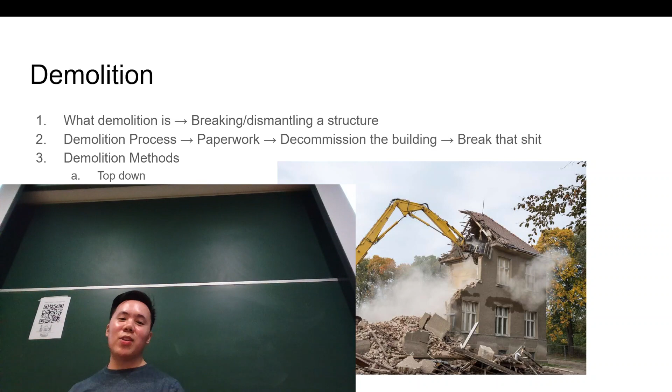Okay, so demolition, you guys would have gone through it, right? I'm just going to briefly run through what demolition is. So demolition, you're basically trying to break down some sort of structure, dismantle it. The demolition process usually has a lot of paperwork, and then you decommission the buildings to get all the electrical lines, gas lines, water lines, and then you break the structure down. Demolition methods: top down, high reach arm, wrecking ball, implosion, and induced collapse. And then demolition safety, just PPE and making sure the site is separated and not dying, basically.

Okay, all right. So before we go into earthworks, I just want to draw a small diagram. It's not loading, bro. Oh, okay, all right, so...

Basically on any piece of land, right—let's say this is the land. There's going to be trees, hills and stuff like that, and maybe even buildings that are pre-existing. So let's say I'm infrastructure for New South Wales and I wanted to build something new on this plot of land. These are all, this is an old building that we don't use anymore, and we have trees and undulating terrain and stuff like that. So we have these hills and we want to get the land ready to build something new. Let's say we're building a metro station or something, I don't know if that's ever been thought of.

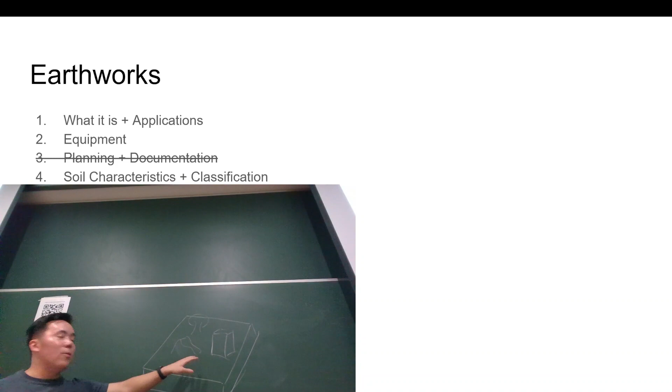So we would first want to make sure the land's flat before we can build anything on it. So what would be the first thing we want to do? We want to actually get rid of all the old buildings first, because the landscaping we can deal with after, but we want to make sure all the buildings are just cleaned and gotten rid of. So this first part, when we get rid of the buildings, what would that be? That would be demolition, right? So we go through that demolition process, we break down all the buildings, and then once all the buildings are gone, basically, we're left with...

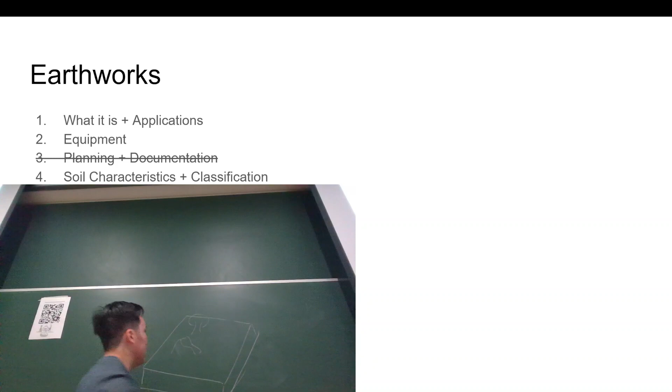Trees, hills, right? And we kind of want a flat surface that trains can run on, for example. So this second part, when we get rid of all the terrain and flatten it and do the landscaping, that's called earthworks. So that's what we're doing for this first part.

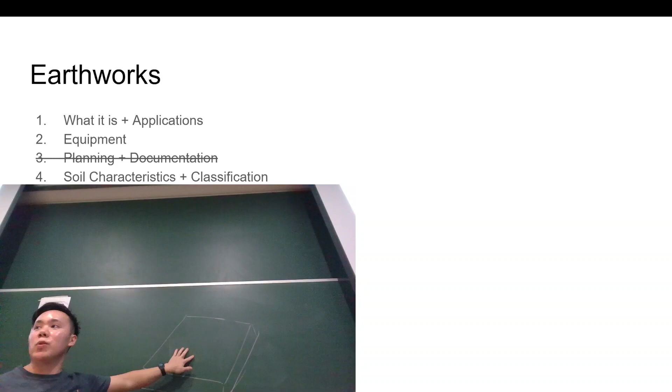After that, after all the earthworks is done and all the land is flat here, the thing that we do after is usually concreting. And concreting is usually we're building a foundation out of concrete so that we can actually build a building on top of it, because we can't build it right on the soil because soil moves a lot, yeah?

Okay, so for this first part of earthworks, we're just going to talk about what it is. Earthworks is manipulating the land or shaping the earth to fit our construction needs. Every site, no matter where it is, will need at least a tiny bit of earthworks. So even if you're building a granny flat in the backyard, the earth there may just have a slight gradient, and that's not good. We want to make sure it's flat, or we want to make sure the slope is a certain direction. So every single site, no matter how small or how big, will need some sort of earthworks.

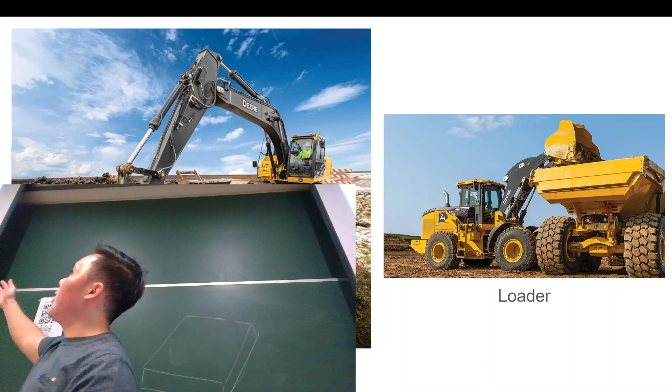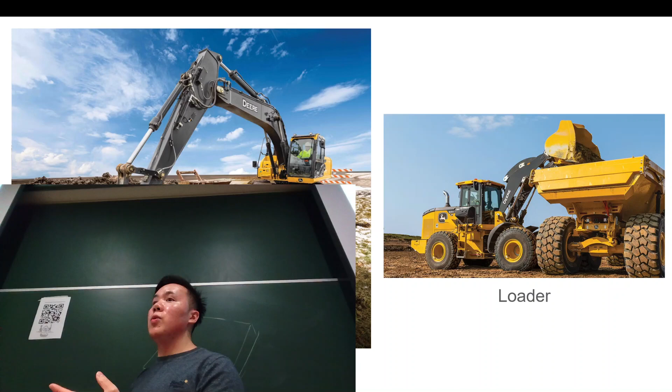The second one here is a loader. What this loader does is, for example, you can see the pile of dirt on the left there - it can take that dirt and put it into a truck. Now, an excavator can bring the dirt and put it directly into a truck, but if there's heaps of dirt, we actually want to minimize the amount of time that the excavator has to use to put that dirt into the truck. You'll learn about it with Josh when he goes through the actual formulas on calculating efficiency and the speed of how much earth an excavator can move. But typically on a larger site, they will use a loader as well.

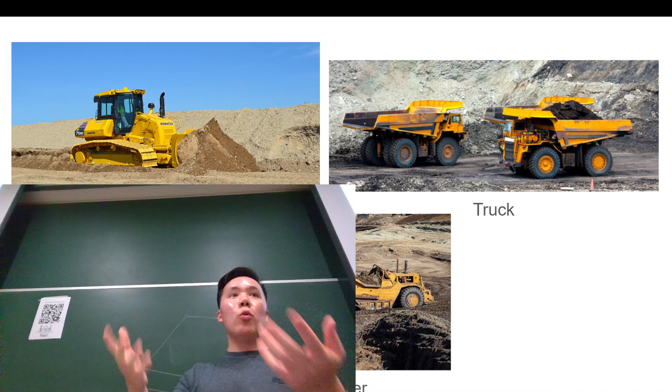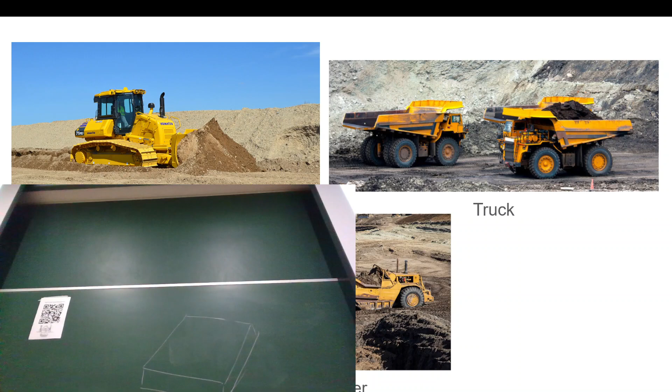A truck is used for holding dirt, and then that dirt is transported to somewhere else - usually off-site, or sometimes it's just put onto a side of the site that is not used right now. And a scraper is kind of like a dozer and a truck combined. It can actually hold a little bit of dirt, not as much as a truck, but it can hold the dirt and drop it in other places. So what a scraper does, it kind of does what a dozer does - it digs up, it plows up that land, and then it takes a little bit into its storage bin. You can see in the middle here, and then it can drop it wherever it needs.

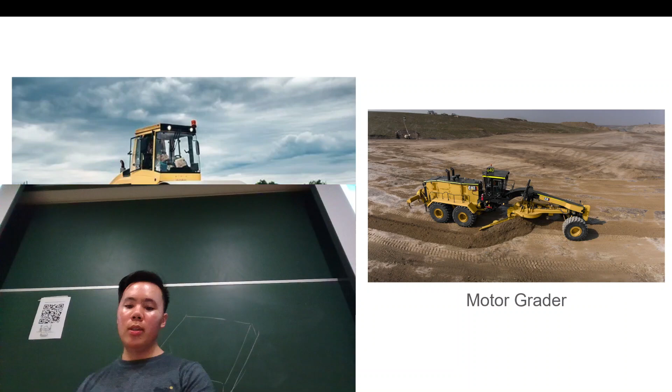Okay, so machinery - let's just classify all these. Excavation and loading, this is actually just digging up the land, and you think of this as the first stage. The kinds of equipment that we would use are excavators and loaders. So we basically are just getting the dirt moved into certain sections - this is like a bulk amount of movement. Next, we have pushing and hauling - that's basically the dozer, the truck, and the scrapers. They're trying to push dirt and move it somewhere else. And then we have finishing, which will be the rollers and motor graders, which kind of flatten the land.

All right. Okay. So basically, that's the kind of equipment and stuff that happens on site, right? So when we do the calculations, this is what we're gonna have to do. When we move the dirt, yes, we can move it, but we also want to calculate how much our truck can carry and whatnot. So these are the types of calculations.

So in general, for soil characteristics, high moisture is bad. Think about standing on wet sand when you're at a beach, right? You're going to start to sink through, you start to fall inside of it. So think about a truck now on a beach. It will actually get beached. It will fall into the sand. So moisture content is basically the amount of water to the amount of dry soil, and then you calculate that as a percentage.

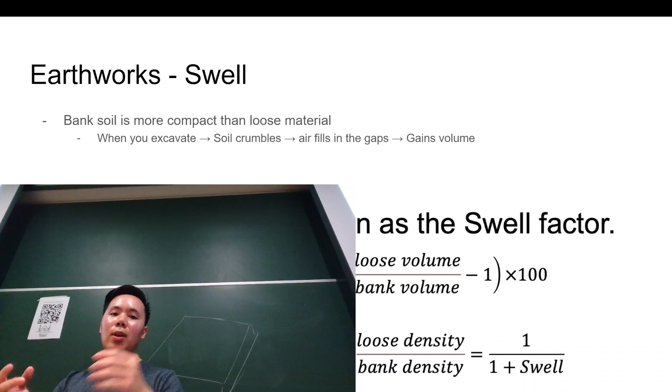So swell is, after you dig up that soil, the air goes in, and we get swell, and that's just the loose volume over the bank volume minus 1, and then we multiply that by 100%. I don't know how that comes about, but just trust me. I'm sure the tradies know what they're doing.

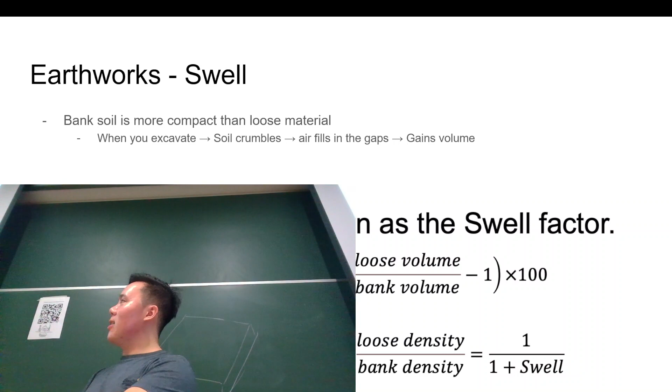And then the load factor. This is actually the more important thing. Usually they will give you a swell percentage, and then you have to figure out either loose volume or bank volume, and then you're gonna use that to do the load factor. Load factor is basically how much you can put on a truck. It would cost you more if the truck had to run more times to carry the same amount of dirt, so we want to pack on as much as possible, increase our efficiency and our KPIs.

Okay, shrinkage. So this is the opposite, right? So this is like a penis in the winter.

So it shrinks when we force the air out of it. The granules become more tightly packed. We're taking out that air, it becomes more tightly packed. Happens when we compact it, when we roll something over it. So shrinkage equals 1 minus compacted volume over bank volume times 100. And then we have the shrinkage factor as well, and we've got the formula for that.

Okay, does anyone have questions about that before we get into other parts? So we understand swell, shrinkage, yeah? Yes, okay, cool.

All right, so volume estimation. This is a topic that is theoretically easy to understand, but it's really easy to mess up in a calculation. I'm not gonna go through the calculations because we'll be here until tomorrow, but I'll go through the general gist of how these work. So the cross-sectional method is our first method. Think about this as a 1D method. It's usually used for things like highways and really long runways and stuff like that. Because when we have a, let's draw this out.

When we have a long road, usually all our roads are quite flat, right? So just take this as a cross-section. There's a cross-section of our road. Now, before we build a road on it, there's going to be land that kind of has hills and valleys, right? Some are going to be higher than others, some are going to be deeper than others. So what we want to do is level this land.

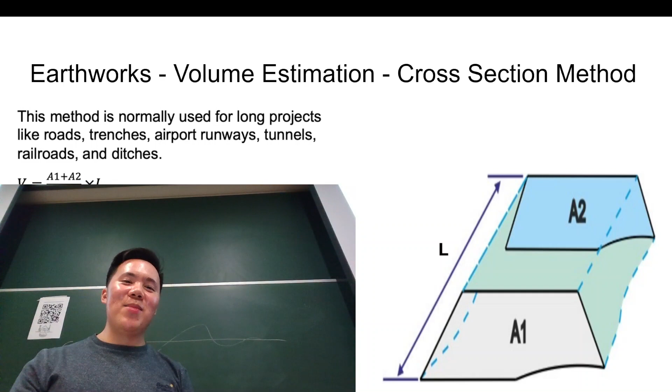Now, the cross-sectional method is going to basically take this 1D section, and it's going to move dirt from the high areas to the low areas. So we want to fill in all the low areas, and we want to get rid of the high areas. And then once it's done, it should be nice and flat. So it's just areas, volume of trapeziums and stuff like that, basically. It's not too difficult.

Okay, grid method. Actually, anyone have any questions on the cross-sectional method? No? Okay. Grid method, instead of 1D this time, we're going to think in 2D. So the grid method has a square or some sort of shape, and we're going to divide it into equal sections, and then you take each of these nodes. Basically you're taking dirt from around this node and spreading it out to make it all level.

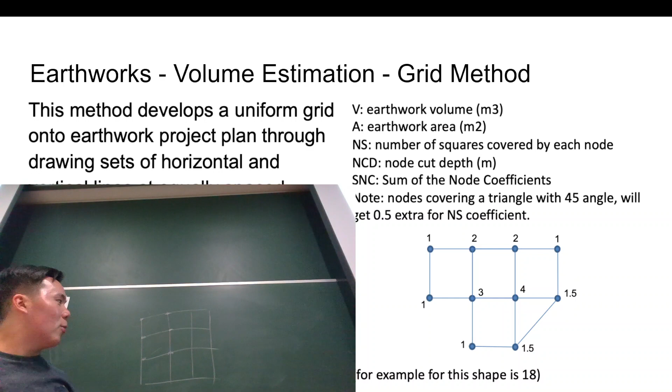So you're just taking the height of each node and you're trying to flatten it. And there's formulas to do that. Mosen's pretty good at teaching this part, so I wouldn't worry too much about it. But just think about it as 2D for grid method. And then this triangular prism method, I think Mosen put this in the midterm last year as well. He goes through this in pretty good detail as well.

This one's basically for taking an irregular shape, and you're dividing all the shapes into triangles. So it's called a triangulated irregular network. You're taking a center and dividing into triangles, and you're moving dirt from one of these triangles to another to flatten the land. So the same principle applies with all of them. Grid method, triangular prism method, think about it as 2D. And for the cross-sectional one, just think about it as 1D.

Okay. How are we doing for time, Henry? How much of your slides have you gone through? About half? Not half, yeah. 40? Oh, you're going like on time.

Okay, cool. All right, soil classification. There's a lot of detail on these slides that Mosen goes through. All you need to know is that A, B, and C are in order of strength. A is going to be the strongest, C is going to be the weakest. That's what I would take note of. So A is strongest, B a little bit less strong, and C is weak. So why do we need to know about this kind of soil classification?

Well, we need to know about this soil because there are different ways that we can protect ourselves from soil collapsing. So think about a sand castle. You can only build a sand castle so high before it starts to tip over. Imagine you're building it out of dry sand. When you start putting more and more sand on top, it's going to start falling off the side. So what we need to figure out is how strong is the soil, and what angle can we actually put it at?

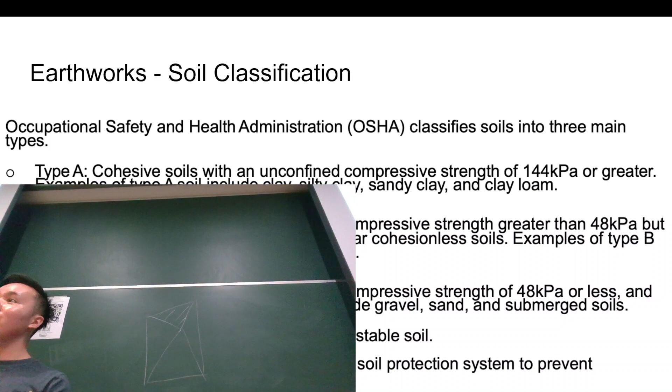Or different other methods we can use to stabilize the soil. Because we don't want soil to move when we're mining or excavating or building, because that would be very, very bad, right? It could cause catastrophic failure. So ways that we can actually protect ourselves, right? So we need to know the soil characteristics to be able to use a protection system that makes sense for it.

Okay, so there's 4 kinds of protection systems. We'll go through all of them today. Sloping, benching, shoring, and shielding. Now we'll talk about the first 2 as a pair because they're done in more rural areas. You would see these more in mines and stuff like that where they're a lot further away because they take up a lot of space, right?

You can see the sloping takes up not only vertical space, but it takes up that horizontal space as well. Benching, the same thing. Whereas shoring and shielding, you can see it's straight vertical, right? So you can cut out land like in Minecraft, basically. You just dig out a 2x1 block or whatever, right? So sloping is literally what it is. It's some sort of hill and it's just the slope, right?

And the angle that we can have the slope at is determined by the soil type. Basically, this angle here, I think it's alpha, has a maximum angle based on what kind of soil it is. So A type soil is going to be the strongest, so you can have it more vertical compared to C type soil, which is going to be a lot weaker, so we can't have it as a steep angle. And B is in between, is 45. Okay.

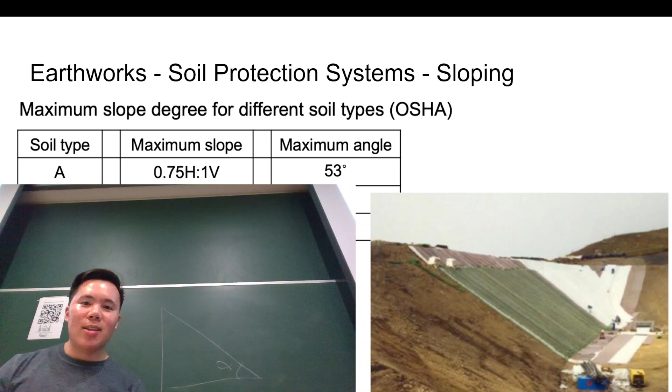Okay. Feel free to interject, Henry, if you have any questions. Just a quick note as well. You'll send over these slides later as well, right? No. So if anyone's copying stuff down and you miss it, then... Yeah. I think listen to what I explained more because these slides are a bit cooked. And of course we have the recording going on, so you can check that. But does it feel like it's going too quick or too slow? This is okay. It's hard because you have to help people who are writing stuff down as well. Yeah, exactly. Okay. You're in a good pace.

All right. So next one. Sloping is our first one, the most simple one. Benching is our second one. Think about Minecraft, you're jumping up the steps, right? This is what benching is like. We determine the height of each bench and the length of each bench based on the soil type as well. You can see on the slides here I only have soil type A and soil type B. It doesn't actually work for soil type C because it's too weak to bench.

So think about this, a bench here, the soil here is going to want to collapse that way, right? It's going to want to fall over into this side. Now, soil type A and soil type B are going to be strong enough to hold themselves vertically for 1.5 meters and 1.2 meters respectively. But soil type C is too weak to hold itself upright, so it's just going to collapse.

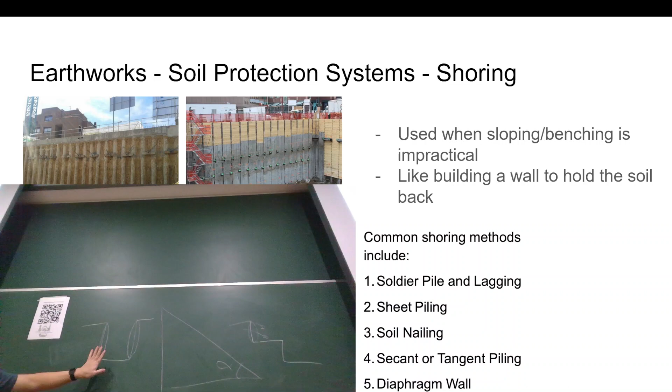So it doesn't allow the soil to collapse on the inside, right? Because there's gonna be concrete holding it back, yeah. Okay, so common shoring methods: soldier pile and lagging, sheet piling, soil nailing, secant or tangent piling, and diaphragm walls.

I don't know why, but Mosen covers this part in a lot of depth, but it's not usually heavily covered in the midterm for some reason. But he might change it this term, so don't trust me on that. Basically, we're just building something upright to hold back soil.

Okay, earthworks, soil protection system. We're going through shielding now. So shielding is something that's a bit more temporary, right? It allows just a small number of workers to be inside the shield. So there's going to be one worker inside there, and they might be doing some wiring, they might be doing some plumbing, whatever it may be.

Shielding is like shoring, except it's temporary. It's just a metal bin, basically, that they drop down into the soil, and that just stops it from collapsing inwards. So it just creates a safe space.

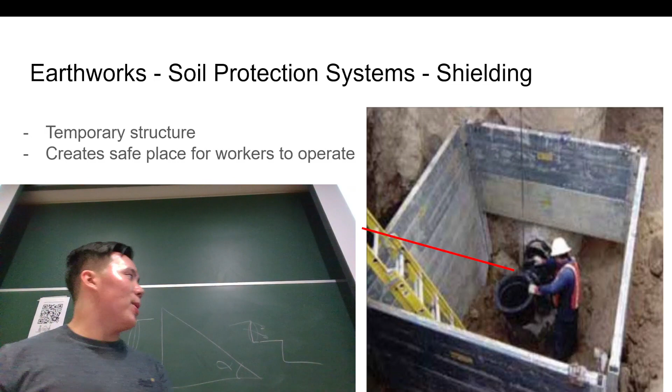Okay, concreting. It's my favorite part. So back to that initial diagram. We got rid of the buildings through demolition, and then we got rid of all of the trees, the land, through our earthworks. Now is onto the good part, the concreting. Now that our land is nice and flat, we want to pour some sort of concrete slab on top, so then we can build our new buildings.

So this concrete slab is the next part we're going to talk about. First of all, what is concrete? Concrete is like man-made rock, basically. It's our version of rock that we can shape into whatever we want. You've probably seen concrete cast into different shapes and curves. We can do that because concrete is almost like a liquid, so we can shape it into whatever shape we want.

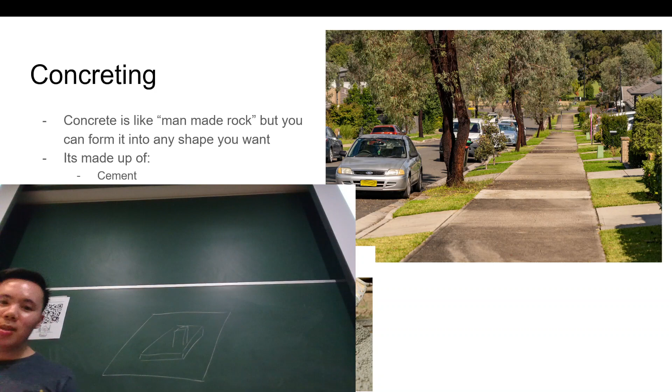So concrete is made up of cement, small aggregate, large aggregate, and water. Cement is basically limestone that's been baked in a really hot oven, which is called clinkering, and then they crush it up to make cement. It's just powder, and you add water and it reacts to become a paste. That paste combined with fine aggregate, usually sand, becomes mortar, which is what they put between bricks. And if you add coarse aggregate to that, it becomes concrete.

Okay, anyone need to copy that down? Okay, I'll give you guys a minute. Just learned that, the week one of concrete. Huh? You just learned the week one of concrete, right? Yeah, I learned that from the conversations with you. Oh, okay, yeah. Concrete is my favorite mixture.

All right, so when we pour concrete, there's something called slump. Slump is basically how much the concrete spreads. A slump test is basically a bucket they pour concrete into and then lift up, and you see how much the concrete spills out or sags. You can see that this concrete here has a high slump, so it's spreading heaps.

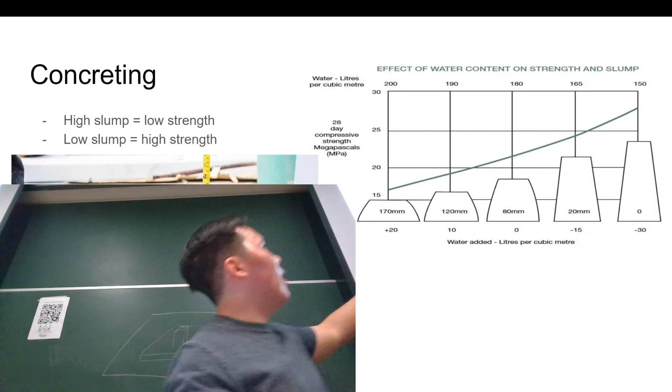So think of slump as spread. When it spreads a lot, that usually means there's more water, and more water means lower strength. Something with a low slump will stand up a lot taller, and it's going to be a lot higher strength when it cures. I think you will need to learn this diagram. It shows how much water and what strength the concrete has based on the slump. You can see that more water means it's going to be a lot weaker.

Anyone have any questions about the slump test? Okay. Yes? Why would you want it to have higher slump? Higher slump? Oh, so higher slump means it's more liquidy, right? So usually higher slump is easier to pour, right? So it's going to be easier to work into different shapes, right?

Imagine something that's a lot drier, trying to pack it into a wooden structure, right? Or a formwork. It's going to be pretty difficult, right? So trying to pack it into a shape, liquid's going to be easier, right? Think about pouring water versus trying to pack coffee grounds into the bottom of a cup, right? So that's what I would think about.

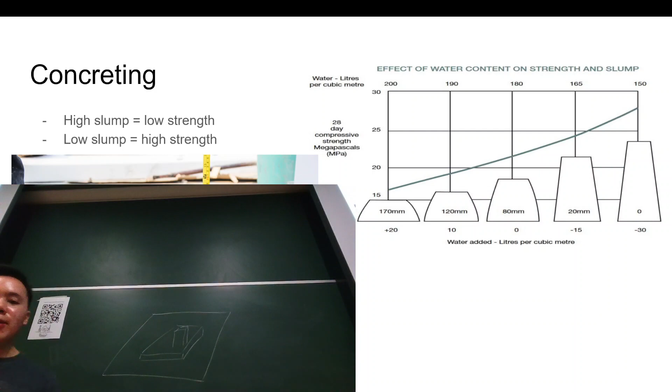This is something that you'll learn on site, but a lot of concrete trucks or a lot of pumpers will try to add more water into the concrete, and that makes it less strong. It makes it a lot weaker, but it allows them to pour it much quicker. So that's the reason they do it, and it's usually not meant to be done. There's a tolerance for the amount of water, but you're not meant to add too much water. So yeah.

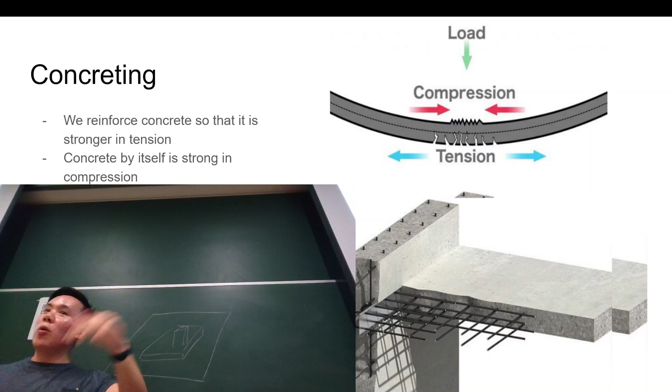Okay, so usually we don't just pour concrete onto the formwork. Usually we pour concrete onto some sort of rebar, right? So rebar is a type of reinforcement. It's basically steel that's laid across the concrete in a lattice shape. So what they'll usually do is once they have that land flattened and compacted, they'll put some sort of coarse aggregate on top, like gravel. They'll compact it again, they'll lay rebar on top, and then they'll pour the concrete in. So that just makes sure that it's a lot stronger.

So concrete is a ceramic, and that means it's really, really strong in compression, right? So when you push down on concrete, when you put a truck on top of concrete, it's not going to crack as easily as when you try to rip it apart, okay? So tension is the weakness of concrete. Now adding rebar into it increases its tensile strength. That means the concrete is going to be a bit stronger in both. It makes it a composite material. So yeah.

It's going to pour the concrete down, and usually it pours it into a machine that mixes all the concrete up again, and then it pumps it, right? So into a boom pump. So you'll have some sort of truck here, and then that will boom the concrete over to where it needs to be poured. So let's say they're pouring a concrete slab in the corner here. It's not practical to move the truck all the way into the site, right? So usually they pour the concrete into a machine, and that pumps it over, and that allows the workers to pour it down here.

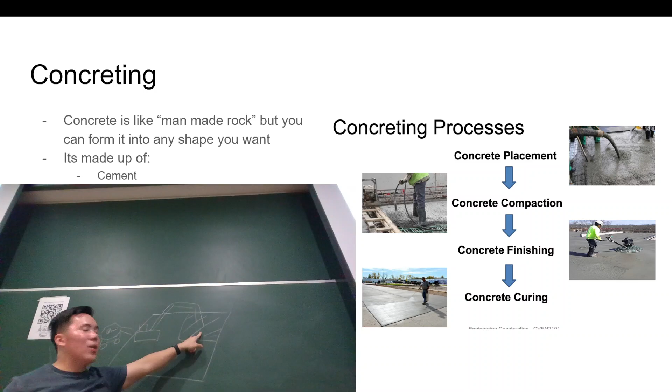So they agitate the concrete, they bring it to site, and you have about 2 hours of a working window, okay? This concrete gets poured into a machine, then the pump, and then the pump carries it all over to the work site, and then you pour the concrete, and then you're done, almost, right? Then you have to finish it, and then you have to make sure it cures properly. So that's how it works.

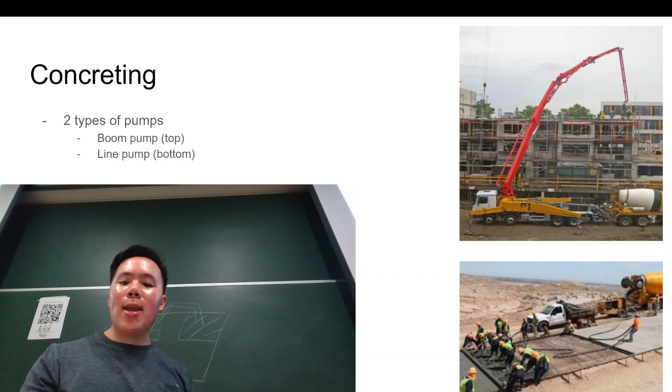So after they place the concrete, they'll vibrate it, right? Oh, wait, sorry. So the two types of pumps, and then they'll vibrate the concrete and make sure it works properly. So the two types of pumps here: we have a boom pump, which is used to transport it a large distance, usually up higher or somewhere a bit further away, and then a line pump, which is like a flexible hose. Basically, it's a rubber hose.

So they vibrate this concrete for 7 seconds in each section, and what that does is it minimizes the air bubbles in the concrete. So what happens if we have air bubbles? It's going to be a lot weaker, right?

Has anyone had chocolate mousse? It's a pretty fluffy texture, and it collapses straight away in your mouth. So think about that. When your car's parked on it, you don't want that to happen, right? It's going to crumble. So what we want to do is vibrate all the air out of it, get all of the bubbles out, and then it's going to make it a lot stronger.

So less air bubbles means stronger concrete. If it's not vibrated enough, it's going to have air and be weaker. But if it's over vibrated, vibrated for too long, there's something called segregation that occurs, which is a concrete defect. Usually when that happens, when it's over vibrated, you need to get rid of it. Once that dries, they're probably going to have to dig it out.

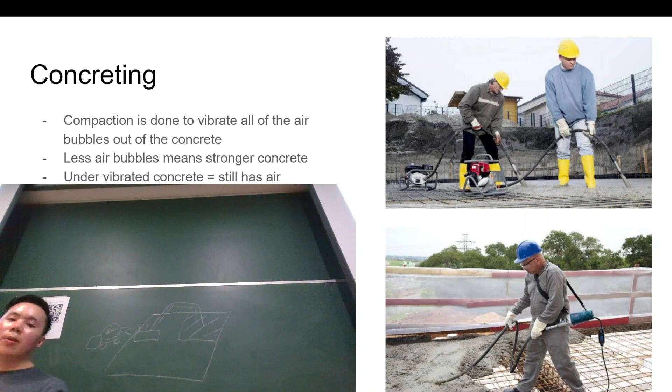Concrete finishing is just making the surface really pretty. Usually they would screed the surface, kind of just brushing over it, making sure that it's all nice and flat, and making sure it's nice and pretty. Usually this is for pavements, and also even in buildings, they make sure it's nice and smooth and whatnot.

Okay, concrete curing. This prevents the concrete from cracking. Now, I feel like a lot of people think that concrete requires moisture to be evaporated to cure, which is true, but we can't let too much moisture evaporate all at once. So I'm just going to draw a concrete slab, and I'll go through why we don't want too much moisture to evaporate all at once.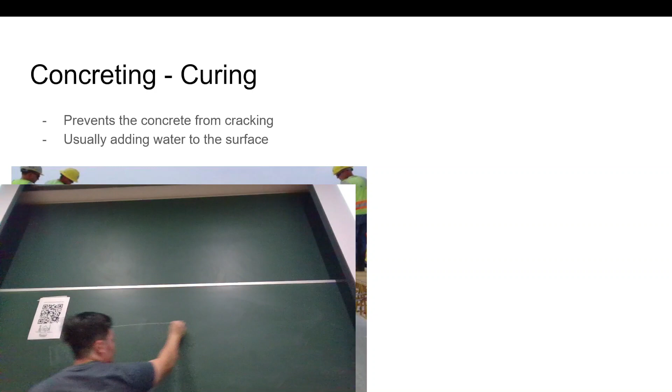So this is a cross section of a concrete slab. Let's say the concrete was however much thick - a fairly thick piece of concrete. Now, when we pour it in, that concrete is going to fill up the whole place. But where is the moisture going to evaporate from? It's going to evaporate from the top. So if you leave it out baking in the sun, that top bit of moisture is going to evaporate a lot quicker than the inside. Think about a cake when you're baking it - the top's going to cook first before the inside.

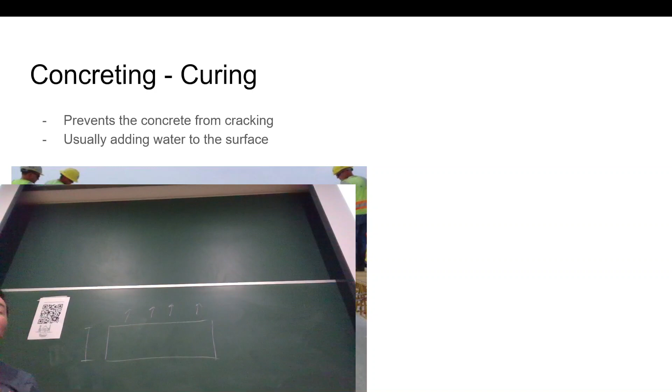So we want to make sure that concrete kind of dries or cures at the same rate in all places. So what they'll usually do is pour water on top, or spray it with water. You can see here, these guys are spraying it with water and then moving the water along so it's nice and even along the concrete. There's another type of concrete curing method called ponding, where they literally put a bed of water on top. That's good for really dry environments and whatnot. But yeah, that's concrete curing.

Okay, cool, concrete defects. First type of defect, segregation. Segregation is not very good, usually because it happens due to the wrong large aggregate size. Imagine when the aggregate is too big, it's going to be a lot denser than the rest of the mixture. Remember, concrete, as I said, we need an agitator truck.

Why? Because it doesn't mix like a smoothie. It kind of sinks to the bottom and splits after a while. Concrete is made up of a couple different things, and when they mix it all together, it shouldn't segregate, but it may segregate because of aggregate size, but also because of over vibration. Imagine you're trying to shake it, and then all the heavy stuff will fall to the bottom, all the light stuff will float to the top.

Or it could segregate because of a high slump. Now, why do we think a high slump might affect the concrete mixture? Open to the whole class. Yes? If it's really low viscosity, there's a certain water content in it, all the heavy stuff's just going to go straight in - yeah, exactly. It's like putting rocks in water, right? The rock's just going to go to the bottom. There's nothing keeping it all together, all mixed. Yeah, exactly.

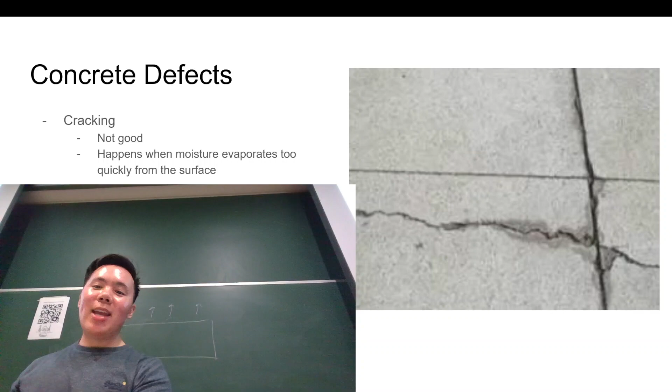Okay, anyone have any questions about concreting? This is my favorite topic. Anyone have any questions about concrete?

No? I'll touch briefly on what admixtures are. Admixtures are basically just adding a little bit of some sort of liquid - an extra bit of stuff that helps the concrete take on some new characteristic. You can add admixtures to slow down curing or speed up curing. There are also ones that let it evaporate less and whatnot. So there's just stuff you add into the concrete.

Special types of concrete - reinforced concrete is going to be the main one you'll be talking about, along with high strength concrete. There's also no-vibration concrete, where you don't need to vibrate it, but that sounds really dodgy to me and it's probably not used very often.

I also talked about shotcrete before. I'll show you just a picture. Is this still recording, Henry? Yeah, okay, I'll show you a picture of shotcrete.

Shotcrete is basically like sticky concrete that they spray instead of pouring. Usually they spray it onto the sides here, or in a tunnel they'll spray the roof with concrete. They'll put bolts in it and then spray the concrete over top, and that just helps the roof hold. Usually they have someone who sprays it, or a machine that just sprays the concrete out.

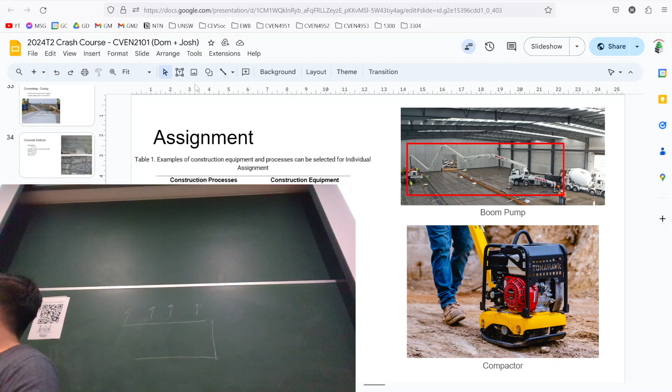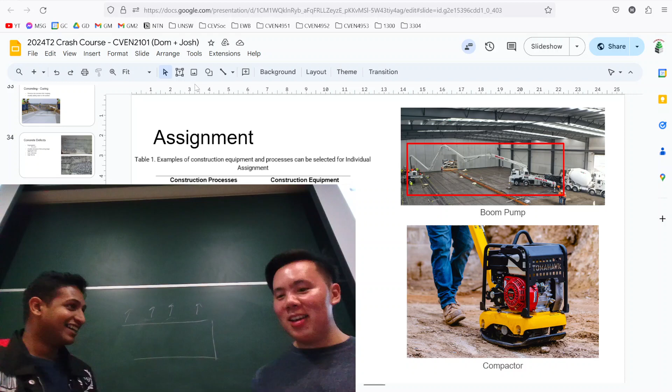Yeah. They're cooked. Wait, no, don't spoil it. I'll probably go through this after the break, and then you take over. Okay, sorry. I want to shut down their hopes and dreams because I've got the exam bell curve already, right? The slide right after this. But if anyone has questions, feel free to ask me or message me on Messenger. He doesn't reply on time. I do reply. It's like 3 business days. Yeah. I'll take it.

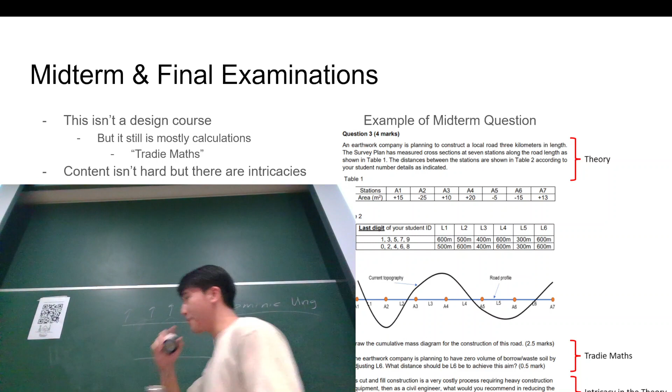Okay. Want to start? Once they're ready. Wait, give them a few more minutes. You have to be somewhere at 1, right? Fair enough. How do I know? Oh, Dom started joining. Henry. Oh, yeah. He was just talking about random things. What slide is he on? He's on 38. I have to get to 82. Okay. But it'll be fine. We'll get them off. They're just chilling around. Oh, can I talk about this part? Yeah, this is your part. Okay.

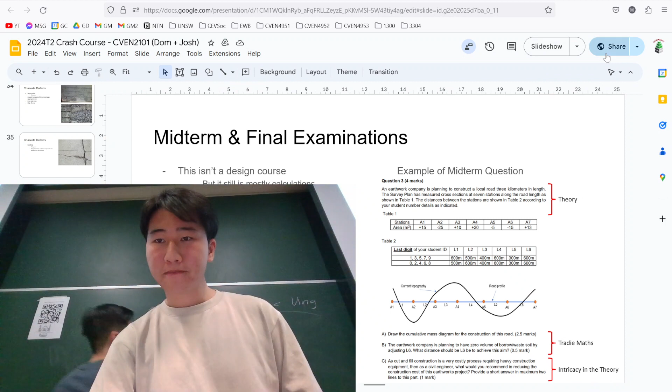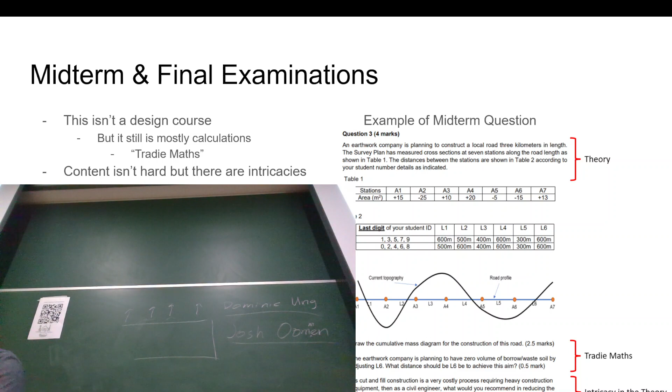Alright. We're gonna start. Josh is sitting. Dude, he's gotten off his astronaut stuff and now he's a teacher. What are you laughing at? Oh, I see. Alright, we're gonna get started. So, alright, Dom, take it away.

All right. I'm just going to talk a bit about the midterm, so this is probably what's coming up and what's most important. This isn't a design course. A design course is mostly a lot of calculations where you're trying to design concrete or steel or something like that. You guys will do that in third year. But this isn't a design course, so it's mostly going to be tradie maths, and what I mean by tradie maths is adding, subtracting, multiplying.

The main thing that gets people is that they use the wrong units or they multiply the wrong numbers, or they try to find something that they're not meant to. The calculations take a long time, but they're not hard. They're super easy. If I can pass the course, anyone can pass the course. The content itself, the information part, isn't that hard, but you really need to understand all the details and intricacies.

A tip I would give is to study a lot for the calculations, because even though Mosen teaches a lot of it as theory, most of the course is calculation based. Your midterm or finals will probably be about 90 to 95% calculation. He might ask you a little bit of theory here and there. Last year, that got changed up. Really? Yeah.

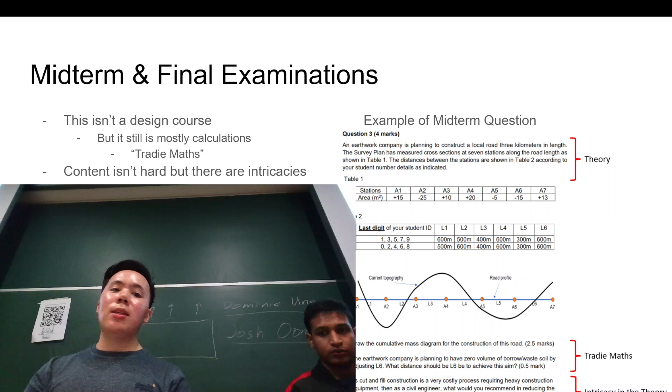So yeah, thanks, Josh. Easy as, thank you. All right, now it's my turn to take over.

So based off of what he just said, what Mosen did do was show us a bell curve of the midterms. Hopefully this doesn't discourage you. Most of us were between 49 and 60 because of how unprepared we could be for all the calculation questions, since we didn't have any solutions for it. But as I said, the terms that he used were very select for all the theory questions, and they were hidden in pages and pages of the lecture notes. Each week was like 50, 60 pages, and it's a term that's found once, he goes over it for 2 minutes, and then that was what we were tested on.

And because of that, and we couldn't use the internet to actually search stuff up, we were all getting a little bit bogged down and couldn't actually solve that question, or we gave an answer that wasn't relevant, I guess. But that was the midterm. The finals, I believe, was a lot more fun and a lot more doable, and I think it will actually bring your marks up if they're lacking behind right now.

So, lecture 6 is one of the only weeks where there are no calculations at all. It is all about sustainability and digital engineering. So sustainability, hopefully you guys did DESIGN 1000. You talked about a triple bottom line. Exact same thing is talked about here. We have environmental, social, and economic. So the people, the places, and the money that's involved. Those three things are very important, because in every single construction project, you have to save money, think about the people that are involved, and think about the impacts on the environment. Those are the main things with the triple bottom line.

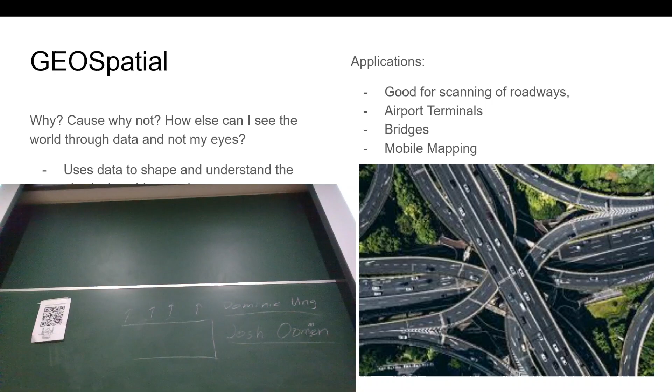They take all the data from all the construction that's happening, and they try and find areas that can be improved upon before it gets expanded on, or they want to fix any issues without tampering with the actual stuff just yet, if that makes any sense. So that's geospatial. We use lasers for that, and it's good for scanning roadways, airport terminals, bridges, and mobile mapping, because obviously those are large distances, and human power for that would cost a lot, right?

It's good for improving planning, design, construction, and it's better for design in terms of visualization, collaboration, estimation of cost. And for fabrication. Fabrication is actually a very key point here, because you want to make sure that things can be fixed before it's built, right? So how can we fix it before it's built? Well, if you can visualize it in 3D space that's not real, but rather digital, then you can fix it at its root. Does that make sense? Okay. And it's also better for occupiers and managers because they can see the building being built in BIM before it's actually created in real life.

Now, Internet of Things. We have a connection between physical devices and the actual buildings and all the machinery that's around. How do they do that? They have sensors that are connected to every single thing here. If you guys have watched Avatar, you know how they get their hair connected to one of those animals, and then they feel the thoughts of it and can see everything from that eye. Something similar to that. You're far away, you put on this VR set, or you get your computer and you're connected to all the sensors, and those sensors pick up on every single interaction that occurs.

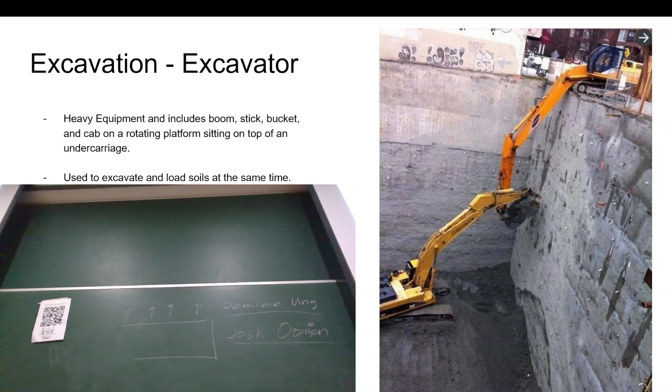There's high flexibility in rotation, lightweight, causing low ground pressure, and ability to be adapted to different functions. So what do I mean by that? Each of the excavators and a couple of other machines, the actual digger at the end can be removed, and there's a different attachment that can be added onto it. So what are the types? Well, we have the hydraulic one. We have the shovel, which is one of the extra things that you can remove and put on to dig out larger areas.

We have the backhoe, which is mainly for what? Versatile excavation and loading, and it's used usually during medium-sized and residential construction. All these different things have very specific times they can be used. You can't use a long reach in a small suburban area, but you can use a long reach when you're trying to get to the very top of apartment buildings.

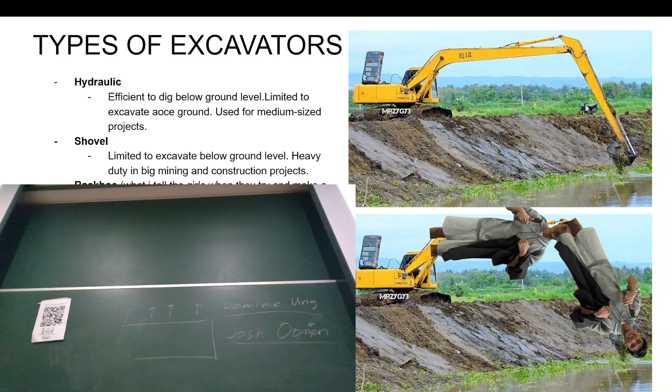And when you get to the long reach, I think Dom talked about it, one of the top-down methods. It's kind of used together to do demolition as well.

All right. Every single machine just uses these 5 letters or 6 letters, nothing else. But depending on which machine, you have a different combination of these letters. So for excavators, we have P = C × B × S × V × E. So what is all of that? Well, I've got them all written out.

Now, the reason I've got table 1, 2, and 3 is because this is the one thing that really pissed me off about the entire course. They didn't provide us with the tables themselves. Now, the final exam was an open book exam. But if you didn't bring in the lecture slides, or you didn't write down the tables, you're kind of screwed for a couple questions. So in my book itself, there are pages of just the tables themselves.

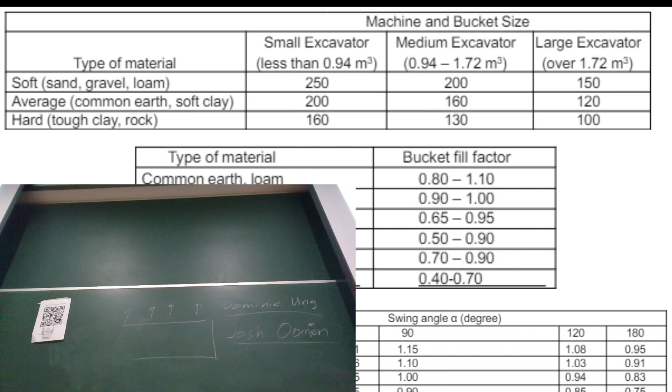So I'll do one example with you guys. So that was a question right at the top. You write down every single variable like usual, and then you just multiply it. But the thing is, for the bucket volume, you have a 0.9 to 1, which means that there is a range of answers. You have to show the maximum and the minimum range.

So therefore, it's from 0.9 to 1. You have a range of 234.9 to 261. And that's what you have to write as your final answer.

Now, as I said, for most of these different equipment, I do have examples, but I won't be going through every single one.

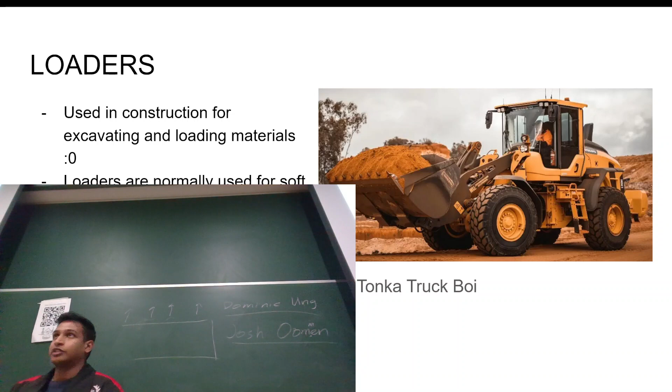Okay, next up we have loaders. Loaders take all the dirt and move it into different areas. It's used in construction alongside excavators, and it's ideal for confined areas because they are, once again, smaller scale machines compared to other things we might go through.

There are two types of loaders. We have the mini loader, which is basically a big loader but compressed, and we have the grappler, which is usually used for timber and lumber. It's really cool watching it grab all the pieces and then move it around and toss it somewhere else. If you've ever seen those TikTok ads of machines that go and get the wood from rivers and stuff, that's what they're doing.

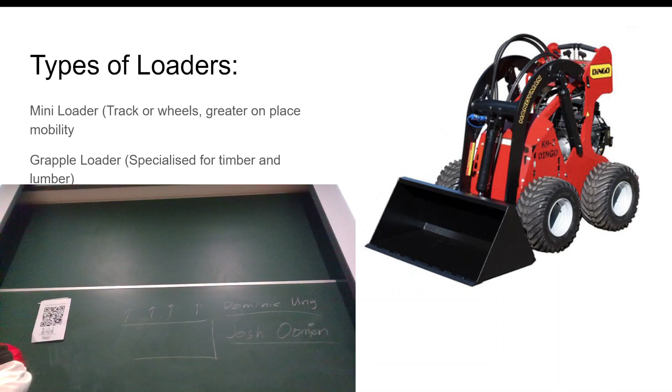Sorry, that was a little bit of a tangent. There we go, another one, another production value. This time we're missing one of the letters from the previous one - I believe it was S.

This time we're just worrying about cycles per hour, the bucket fill factor, the bucket volume, and job efficiency. What is job efficiency? It's just saying how many times can I do this job within an hour - how many cycles can I do, basically.

Once again, you need a bunch of variables, and all that is in the table, which you do have to write down. If you don't write it down, well, I don't know how he's actually going to do it this year, but last year it kind of screwed us over quite a bit.

This time the table worries about loose material, blasted rock, and just things that don't exist within those two specifically - that's why it's under others. So moist loam, soil, cemented materials, rock dirt mixtures, and depending on what type of loader is actually used, it changes a lot of things as well.

So what are the two different types of loaders? Well, we already know there's a mini loader and a grapple loader, but they can be either on tracks or wheels. Depending on the soil that you're on, different bases need to be used.

So here's another example. I won't go through it, but it's basic multiplication once again. Next, we can talk about dozers.

Dozers are tractor units. So now we're done with the excavation - now we're worrying about the pushing and hauling. Dozers are one of the most famous types of pushing equipment, or machinery I should say. A lot of them, you see a big dozer in Bob the Builder - I think it was the blue one.

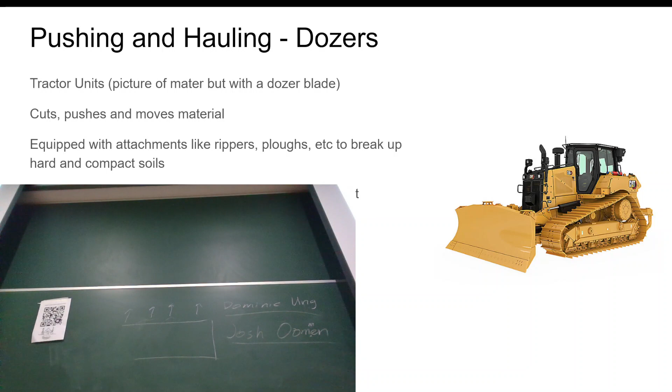But what are they used for? Well, you move the material out of the way - you can move it to the side. You can use that dozer to actually cut into the soil as well, and spread material. Spreading material is actually more common than you might think. You backfill, you can strip topsoil, remove it, break up rocks because of the actual shovel - the blade, I should say.

Now with dozers, obviously there's the track and the wheel dozer - wheels have wheels, tracks have tracks. But when are they actually used? Well, wheels are good for pushing softer soils since they have lower traction and higher ground pressure, so they can kind of stick on it and push. But the actual track dozers are good for harder soils because they can cut it as well, and there's higher traction because there's a larger surface area, and it's lower ground pressure, so it pushes more soil over it.

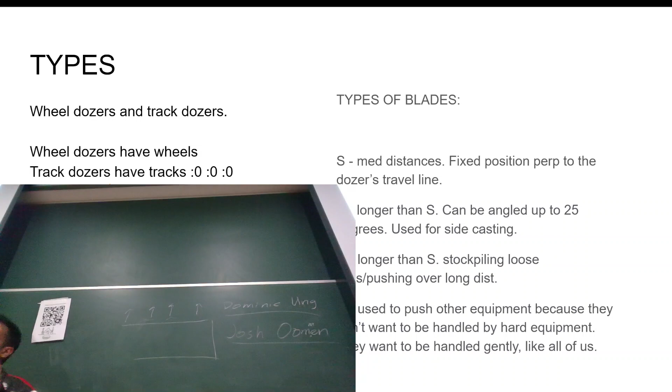Now, on top of the wheel and the tracks, there are also adjustments to the blades themselves. The blades are the S blade, A blade, U blade, and C blade. C is cushion, U is universal, A is angled, and S is - I forgot what the S one was. I have it written down. The S blade was, give me a second.

Oh, the straight blade, who would have thought? It's just a basic blade, right? They use it to cut and just push stuff.

The angle blade can actually shift angles and push the dirt onto its side, letting everything else pass through. The universal blade is just longer than the straight blade, but it's for stockpiling a lot more dirt. Finally, the cushion blade is only used for pushing other equipment. It is quite a soft blade as well.

Oh, look at that, we have CVE instead. So now we're missing another letter, B is not part of this. But there's a big difference because of the V this time.

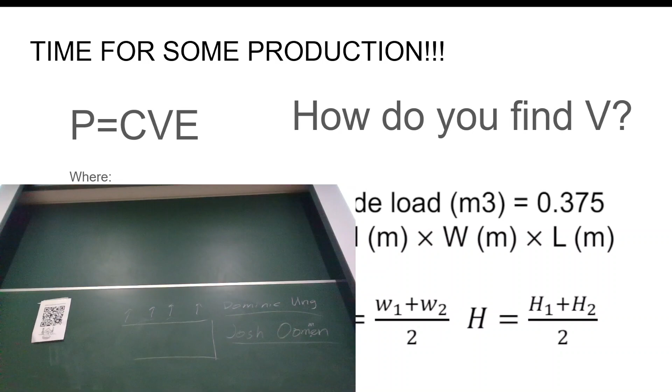We actually have to solve for the blade load by using more math. And what's that math? Well, this is directly from the lecture because I couldn't be bothered to write it down. We got 0.375 times the height, width, and the length. So it's basically the area times by 0.375. Height, width, length, the volume times by 0.375. And how do you find the width? What's the average of the two sides, and the height is the average of the two heights.

I've got an example question as well there for just the blade load, so I've got my answer at the bottom. And then you also once again have tables.

Now depending on the cycle time, that's something else that you have to solve for, and the cycle time is the fixed time plus push time plus the return time. Now how do you find all of that? Well, the tables actually kind of help you solve that question. So for the fixed time, it's always going to be one of those three numbers at the top, depending on what the question says. And the operating speed, the push and the return have different speeds once again, ranging from 2.4 to 4 kilometers per hour, which you have to base off the question.

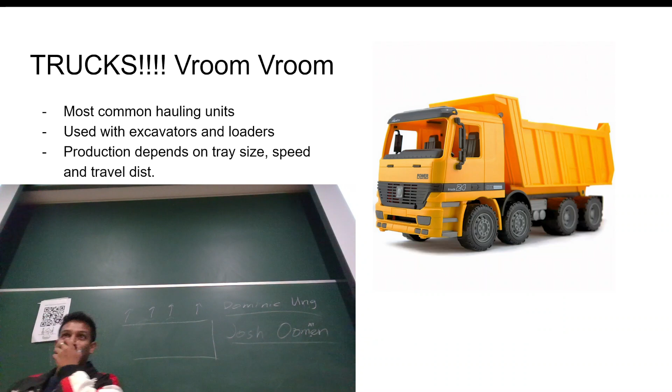We have trucks this time, and it's the main equipment that's found on these sites. It's used to bring in equipment, take away equipment, take dirt into landfill or other areas for dumping. Now, trucks actually have a lot of different variations.

We have the rigid body trucks, we have the articulated body trucks. Rigid just means it can't move, you can't actually separate it. But the articulated means the head of the truck is independent and is on a swivel compared to the tray itself. Think of it like Optimus Prime - when he turns, well the truck turns with him, but it's not like they all turn at the same time.

There's three types of dumping: rear dump, bottom dump, or side dump. You can kind of guess what that is. Rear dump is through the back, bottom dump is from the bottom of the actual tray itself, and side dump is when the tray turns to its side and dumps all the dirt out. On road and off road, that's pretty self-explanatory.

Oh, it's production time. CVE once again, but actually trucks and scrapers and a couple of the other equipment is a lot more complicated than the equipment that we've done so far. The reason being, there's actually a lot more that we have to worry about. So even though it is just CVE, the cycle is actually really cooked here.

So a truck cycle time is the loading time plus the hauling time plus the dumping time plus the returning time. We had to solve for each of these individually. Now each of them have their own solutions, like this: the loading time is the number of bucket loads times by the excavator cycle time. Now how do you find the number of bucket loads? Well you're getting another formula and putting it back into it, which was the truck tray capacity over the excavator or the loader's bucket capacity. This is once again directly from the lecture, you can simplify it however you want in your notes.

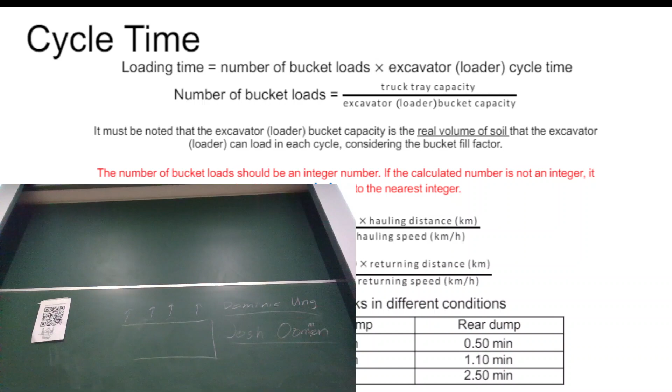The hauling time is all done in minutes, that's why it's 60 times the hauling distance over the hauling speed. Those are also two things that you need for the cycle time. Finally, the dumping time, it's always going to be one of these three, depending on the condition and what type of dump you have. Any questions so far?

All right, easy. Scrapers. We're going on to the finishing equipment, I believe. No, it's still spreading.

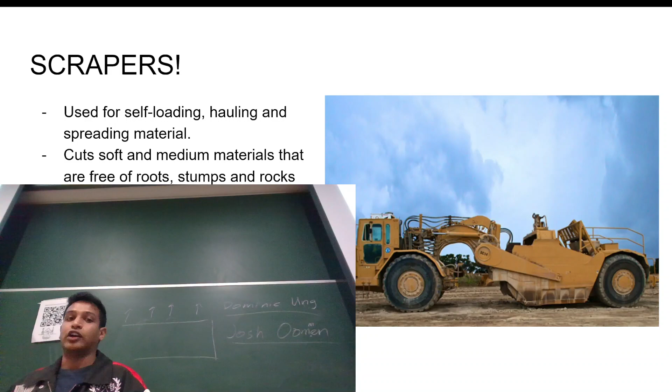We're still in the spreading equipment. Scrapers are the things that plow through the ground. You might see them on farms. They till the dirt to make it a little bit softer, so it's easier to cut up. They cut soft and medium materials that are free of roots, stumps, and rocks. They have open tops for loading and would require a dozer to help push the scraper for hard soils.

There are four types. The single engine, which has one engine. Then we have the double engine, or twin engine, which has two engines. We have the elevating type, which allows it to lift up, useful on a hill it wants to scrape. And finally we have the pull type, which has no engine at all, but uses a tractor or something to pull it along the dirt. That's good for wet, soft, and sandy conditions.

For CVE, we have cycles per hour, which is what we have to solve once again. We have the scraper cycle time, which is the fixed time plus the variable time. The fixed time is the positioning time plus the loading time plus the dumping time. The variable time is the hauling time plus the returning time. You need to get all this information, combine it together, to get the actual answers.

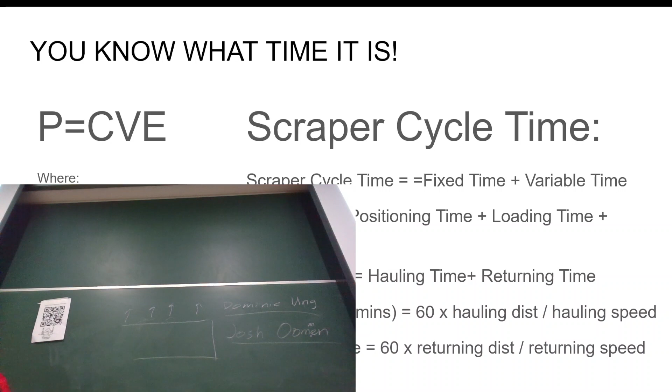It's a little bit cool. As I said, weeks 7 and 8 are very, very dense in terms of calculations. But the calculations are not difficult at all, as long as you have everything in front of you. Once again, you have 3 tables that you need to use, just like the truck. Make sure you follow the actual information carefully.

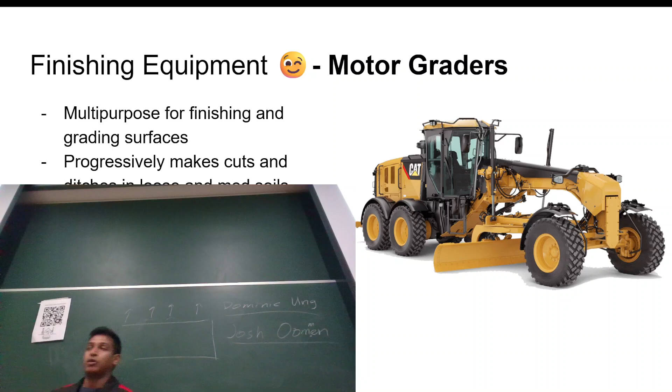Now we have finishing equipment. The first one is a motor grader. It is a multi-purpose machine for finishing and grading surfaces, and it progressively makes cuts and ditches in loose and medium soils as it drives. There are two types, nothing more: the rigid frame and the articulated frame. As with the trucks, the rigid frame means everything is together as one big unit, the chassis is set. The articulated frame is split at one point so it can swivel and turn easier, like the bottom one.

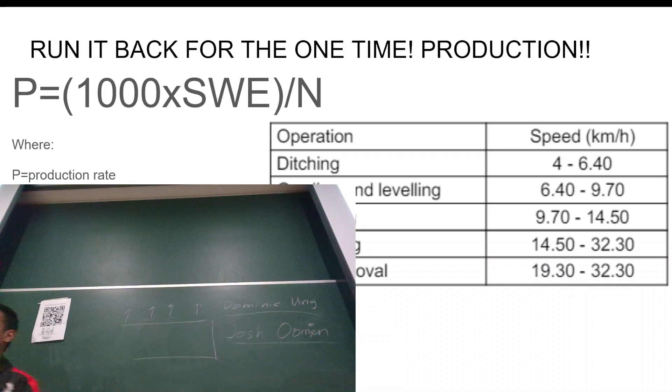Now for the production of this, it changes for finishing equipment. It's not the same as using CVE or B&S. We actually have to solve for a few other things. We have to think about the motor grader speed, the effective width of the motor grader itself, and the number of grader passes - how many times it has to go through an area to make sure it's actually finished properly.

Yeah, that's a big difference. So it's 1,000 times S, W, E, all on top of the number of passes, to actually find the production value of it.

Now, rollers - I think this is one of the more famous ones, the ones you guys can recognize pretty easily. There are 4 types of rollers, and each has a different way of compacting the ground and the dirt underneath. They compact soil, gravel, and asphalt through impact, pressure, vibration, and kneading. There are different parameters which result in different optimal rollers. So how do these 4 different compacting ways work?

The impact is the stress applied by dropping a large mass onto the surface of the soil. The pressure is a large amount of pressure applied slowly onto the soil and then released. Vibration, quite literally, is vibrating. And kneading massages the actual soil, and as it goes over, it flattens it out as well.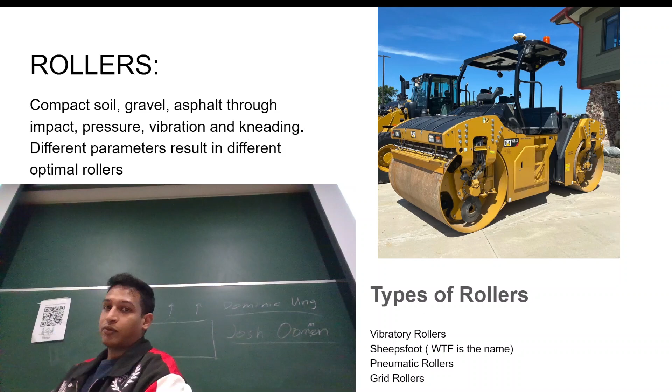What are the types of rollers? We have the vibratory roller, sheep's foot, pneumatic rollers, and grid rollers. I don't actually have any images because I did this at 12 in the morning, so I wanted to sleep. Sorry about that.

And one last time, we have one for production. We have the same formula times 1,000, but we do have a T added into this, which is the thickness of the actual layer that needs to be compacted. Because obviously, dirt has a certain layer thickness, and it needs to be flattened to a certain size as well.

It can't be too thick, it can't be too thin, it has to be just right so that they can lay other things on top of it. Once again, you do have tables for this, which you need to use. The first one is suitability of compaction methods for different types of soils, so that tells you exactly what roller you want to use. Then the second table, table 14, actually uses that as well; you're using those two in tandem with each other. Finally, table 15 tells you exactly how many passes you need and the thickness of the layer itself.

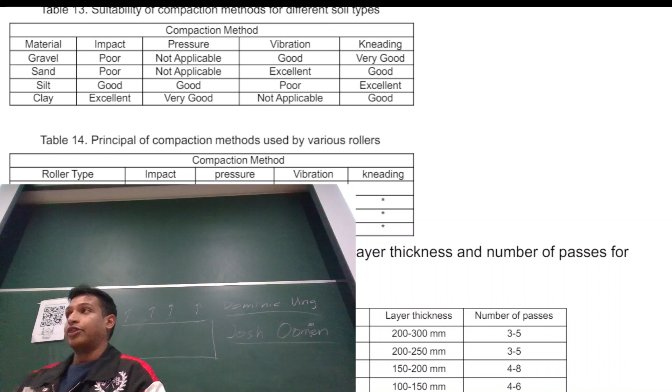All right, so that's lectures 7 and 8 done. That's all the equipment that we have to worry about. So now we have to worry about the actual economics. Obviously, you get the construction site done, but you actually have to pay the people some money. So how much money are we actually paying? Well, that's what we're about to go through.

There are 2 types of costs that we have to worry about: ownership and operation. The ownership is the one that takes the longest time because of the depreciation. Ownership consists of the initial capital cost, the investment or the interest, the insurance, tax and storage, and depreciation. All of these have different formulas to solve, but the one that we'll be worrying about for week 8 specifically is depreciation. There are 4 methods of depreciation.

Let's start with what depreciation is. Depreciation is just the value that the equipment loses over time. That's the best answer. Anything wrong with that would cause incorrect values for the depreciation expense, wrong end of period net income, wrong debt to equity ratio, and a wrong balance sheet.

So ultimately, as I said, you could be an expert at fraud if you do it wrong. So I guess there's some win in this, but obviously you might get sued by the people that are paying.

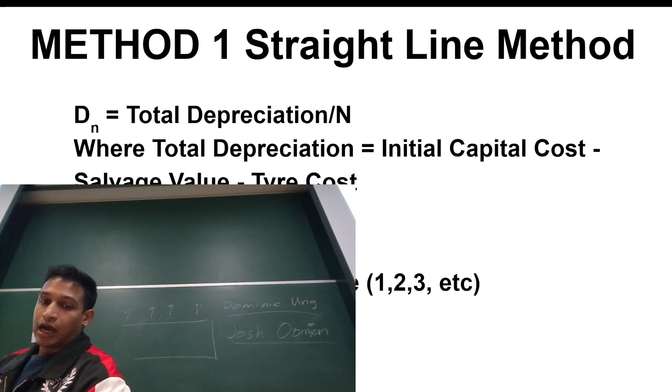The total depreciation is the initial capital cost minus salvage value minus tire cost. That is the one thing that will be repeated in all the different depreciation methods. The formulas change for each of the four methods. When solving these, I'll show you one as an example. We have the straight line depreciation method as a question, and we also have a table that I've written up here.

The first thing we have to solve for is the annual depreciation. How much is lost every year? Well, remember, the initial value minus the salvage cost minus the tire cost, which is found right over here, which means that every year it loses $12,000. So that's why this middle column is always 12,000.

Now for the book value right here, you've got the main cost minus the salvage value, the tire value, and then you minus the depreciation per year, and that is your first book value. From there, you just subtract the depreciation all the way until you get to the final value, which is 6,000. This 6,000 has to match the salvage value in the question. If it matches, that means you've done it all correctly.

Yeah, that just means that you've matched everything up, and that means your calculations are all good. And, well, that's the straight line method. We'll move on to the next method, which is the sum of years digits. So this one is a little bit confusing. I actually didn't like this method.

What it is, if you're asked to solve for the salvage value of, let's say, an excavator that's been in use for 5 years, you have to think about which year it is. So let's say it's year 1, right? You would have to actually use the digit 5. It goes in inverse order. So year 1 is 5, year 2 is 4, year 3 is 3, year 4 is 2, and year 5 is 1. Yeah, it's just inverse order. And that is something that he kind of drills into your head when you do this method.

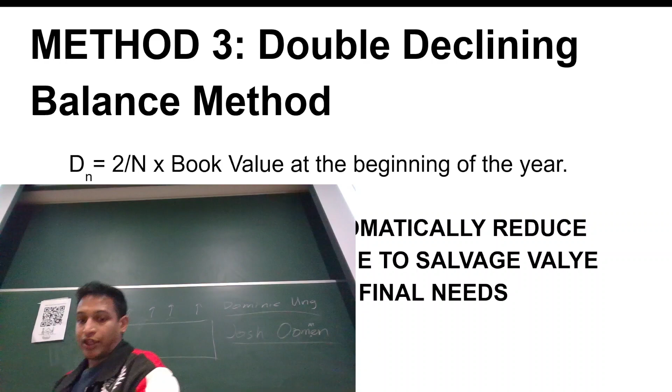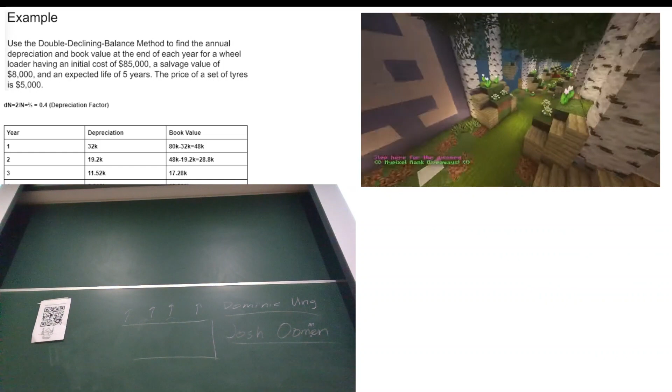So, as I said, we have the 0.4 over here, times whatever your book value is. You have all those values. But in the final year, the book value is 6.2208, which is highlighted in yellow. But if you look at the question, the salvage value should be 8,000. So obviously there's a missing amount. So what do you have to do? You just have to adjust the final year so that it hits 8,000.

So instead of doing 4.1472, you manually change it. You quite literally change the numbers so that it just hits 8,000. That is the only difference for this one. It's pretty straightforward. Everything else is just multiply 2 over n times the book value, and you'll get the answer for every other year. You just have to make sure that 8,000 is reached somehow by manually changing it.

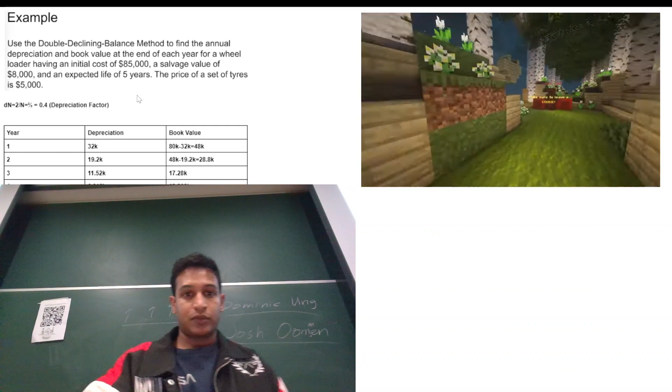And the final method that we have to worry about is the modified accelerated cost recovery. Well, Cn is the depreciation coefficient, and I believe you're given a table once again. Yeah, these are the tables. Depending on the question, they'll tell you it's either a 3, 5, or 7-year cycle. Let's say it's a 5-year cycle. In year 1, I have to use the coefficient of 0.2.

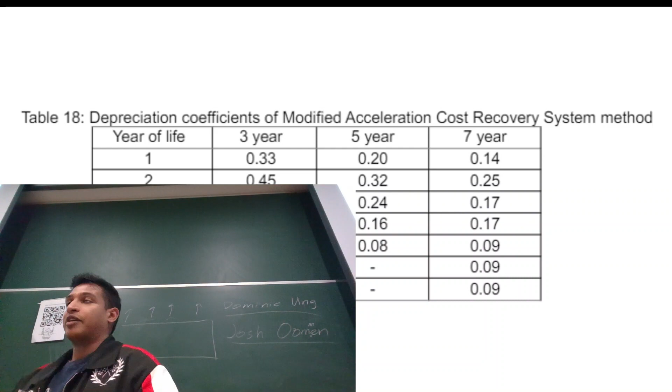In year 2, I have to use the coefficient of 0.32. In year 3, 0.24, all the way to year 5, which is 0.08. All of those coefficients have to be used. You can't just choose one and then do the entire equation with just one. You have to use all 5 of them, or 7, or 3, depending on how long the equipment is actually used for. So one final example: calculate the book value at the end of each operation year for a loader. Based off of the table that's previously given, we know it's 5 years.

So we're using the middle column. Can I go back? Okay, I can't go back. Well, I've written out the coefficients anyway: 0.2, 0.32, 0.24, 0.16, and 0.08. And the total depreciation is 120,000 minus 18K, which is actually 15% of the initial capital cost, minus the tire cost as well. So it's 95,000 as my total depreciation.

So year 1, I used that coefficient times 95,000 to get 19,000 as my depreciation for year 1. For the book value, remember, it is the initial cost minus the tire cost minus that depreciation. You get 94,000 for that first year. Then the second year is 30.4, so you subtract that, you get 63.6, all the way to 18K, which will, once again, match with the 15%, which is the salvage value, which is also 18,000. Make sense? Everyone's all good with that?

All right, last thing, this needs to be remembered, like a big note. The first year's book value is the initial minus the tire minus the depreciation. What you're doing when you're subtracting the initial minus the tires minus the salvage is finding the total depreciation. There is a difference between the two. Okay, so that's all the 4 depreciation methods done.

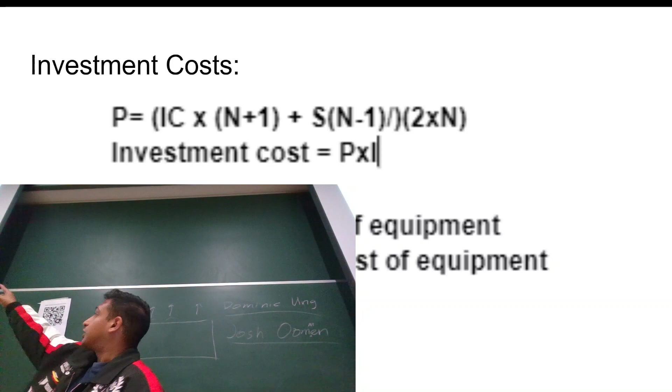Now we have to talk about the other 3 things, which is the taxes and storage, the investment cost. That's all under ownership, but they're really easy. They're really straightforward. Once again, very simple formulas that you have to write down, and then based off the information that's provided, you just solve it. This first formula at the top, P is equal to IC times (N plus 1) plus S times (N minus 1), all over 2N. That is very important. That will come up quite a bit in every single one of the ownership costs that we have to solve for. Once again, this will be sent to you guys, so you can use it then.

So the first one is insurance, tax, and storage costs. That's quite literally pretty straightforward in what they are. Insurance, percentage of your total cost. Tax is how much you actually have to pay to the government, and the storage is how much it costs to actually keep the equipment on site or inside a, like, what's the place called? Kennards? Yeah, like a storage unit. That's the one. You have to use the P is equal to so-and-so for all of these. Oh, did I forget one? Oh, no, sorry. This is investment. This was ITS. Okay. So we've just gone through all the 3, just using those formulas. All right. So now ownership is done.

Now we have to think about operation costs. Operation cost is the second half of the economics. It's also pretty straightforward. All of these 6 things have their own individual formulas that you have to write down, remember, and solve for in the exam. Fuel cost is the first one. You have to use another table. I apologize, but it is what it is. We have horsepower, time factor, fuel prices, percentage of operation conditions, and the fuel consumption rate for different operation conditions. That is what you use the table for. So as I said, you'll have favorable, average, and unfavorable conditions, and based off which equipment you're using, you'll have a different coefficient that you have to solve with.

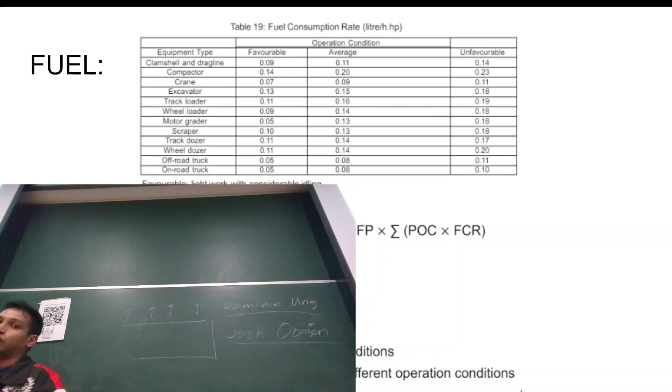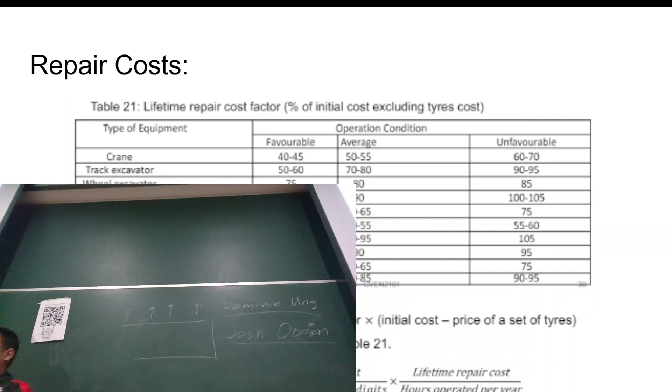Service costs, exact same thing. They have a small table, but you just, once again, solve for the service cost based off the information that's provided. I have one very big example right at the end that I won't go through, but it is there if you guys want to look through the steps to solve one of those big questions at the end of the term. Same thing for repair costs, but this time you have a range. Remember, the range is really important. You have to give the smallest value and the largest value, and show that your answer lies between that range.

Yeah, that's repair costs. Tire costs, very simple. You have a price of a set of tires, you have the expected tire life, and times it by 1.15. It tells you how much money per hour the tires are actually valued at. Special items, so this could be things like replacement items, or the teeth on an excavator, or even the attachment itself. There is a very specific cost for that, and you have to include every single one of the special items that are included.

If you miss one, let's say, you're gonna lose the marks there. And finally, that's all the actual ownership and operation costs. We had to talk about buying, leasing, and renting. When do you buy, when do you lease, and when do you rent? Well, I've included all the advantages and disadvantages.

There's quite a few directly from the lecture itself. We really quickly glance on it. We don't actually go into a lot of detail about it because it is at the very end of lecture 9, and we were very lucky that he didn't actually test us on it. So just include it in your notes.

Just have it there just in case they ask you, hey, if you're trying to get an excavator, would it be better to buy it? Would it be better to lease it, or better to rent it? To see how you can maximize your money saved or spent, depending on what you want. So that's all these three. I've had that in the end of the slide.

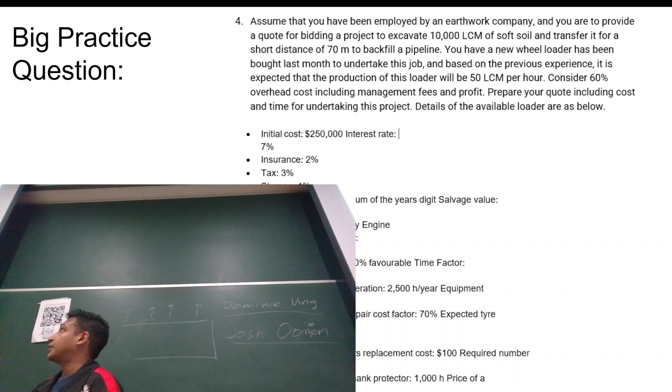And here's the big practice question. They actually provide you with every single variable, but there are some things that are missing, and that's actually found in the question itself. So, how do we actually solve this? Well, we have 5-ish minutes, so let me break it down. Firstly, enjoy this. There. And then we go on to the actual question itself.

So, we had to split this up into the operation and the ownership costs. The ownership is one half, and the operation is the other half. Your left side is the ownership, and the right side is the operation. The question is broken up into 3 sections. The first one is, what is the total cost of ownership and the total cost of the operation. The second part is the combined cost. And the third part is, how long would it take to complete the entire thing.

So you can see that I've split it up into 3 sections: the investment cost, the ITS, and the depreciation. The method mentioned in the question was specifically the inverse order, the sum of the years' digits. So the first year is going to be the value of 6, because it's a 6-year project. So 6 over whatever that total is, times by P, the actual cost of it, you get $60,857.14 a year. Then you find the investment cost, which is $10,937.5 per year.

And you find the insurance, tax, and storage costs as well, which is $9,375 per year. Add that all up, and divide it by the number of hours asked in the question, which is 2,500, and you get $32.47 per hour just on the ownership of the equipment. Now, the operation, same thing. They've given you all the formula and all the values. Just make sure you look at the table correctly. You'll get to $57.59 per hour. Add the 2, the O&O costs, are $90.06 per hour.